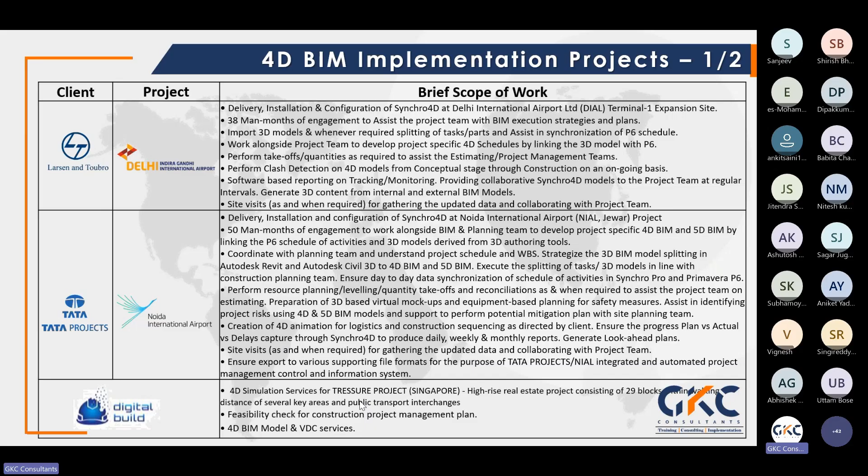Mainly our today's webinar focuses on this only, how 4D BIM is transforming airport infrastructure and how important it is. Our speakers will give you a very fair idea about this.

Now let's look at some real world 4D BIM implementation projects that demonstrate how BIM technologies are being applied in large infra and construction projects. We have done Shobha Limited 4D implementation. We have also done BMRCL in Bangalore International Airport. Shobha Limited is another major implementation that was carried out focusing on 4D 5D BIM workflows.

This included planning, sequencing, quantity takeoffs, resource planning, model management, and construction simulation. The project also involved generating 4D mockups, visual planning outputs, and progress tracking.

Treasures at Tampines, Singapore - we also contributed to the Treasures at Tampines project in Singapore where 4D simulation services and BIM VDC support were implemented for high-rise residential development. The focus was on construction project management planning, visual simulations, and digital coordination workflows.

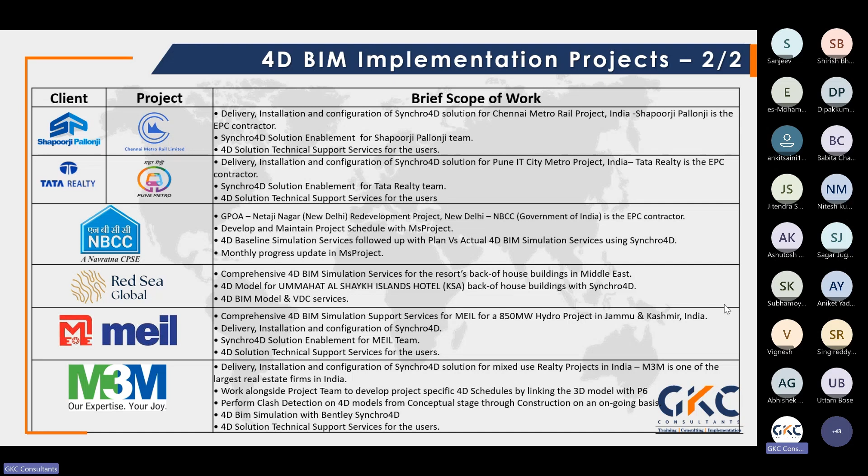We have also supported other infra projects: Chennai Metro, Shapoorji Pallonji, Tata Realty Pune IT, Tata Realty, Netaji Nagar Redevelopment Project, NBCC. So these are some of the projects.

In addition to 4D BIM, we also worked on 3D BIM modeling projects. For example, we developed 3D BIM models for airport infra projects, including the Hubbali Airport Project and Ratle Hydroelectric Power Project. These BIM models help in design coordination, clash detection, and project visualization before construction starts.

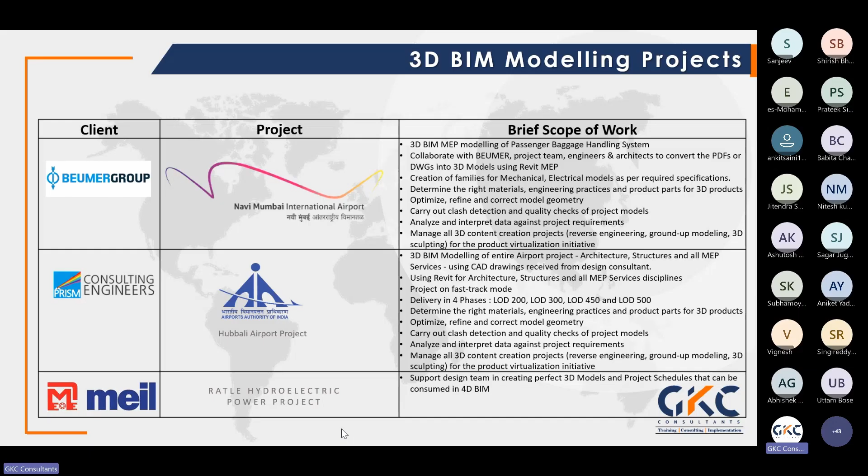This slide also highlights some of the project management implementations delivered by our organization, such as GIC, BEUMER Group, DC Infrastructure, Johnson Lifts. These are some ongoing projects. We have delivered pre-bid for Bangalore International Airport. The scope includes Primavera P6, schedule development, pre-bid planning, 4D BIM simulation. Another one is for IKEA, where we have delivered with Glaze Techno and also Johnson Lifts.

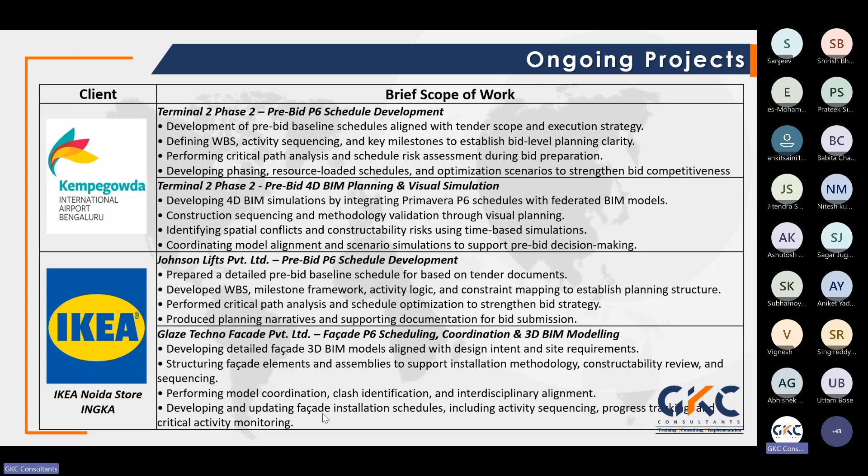Let's move to the main webinar you guys are waiting for. Sorry if I have taken much of your time.

It is now my privilege to introduce our first speaker, Mr. Jitendra Shukla, AGM BIM expert at Nippon Koei India Private Limited. He brings more than 18 years of experience in BIM and digital delivery across airports, metro systems, and infrastructure projects. His expertise includes ISO 19650 CDE, 4D/5D BIM workflows, BIM automation, and digital transformation initiatives. Now I would like to invite Mr. Jitendra Shukla to take the session forward.

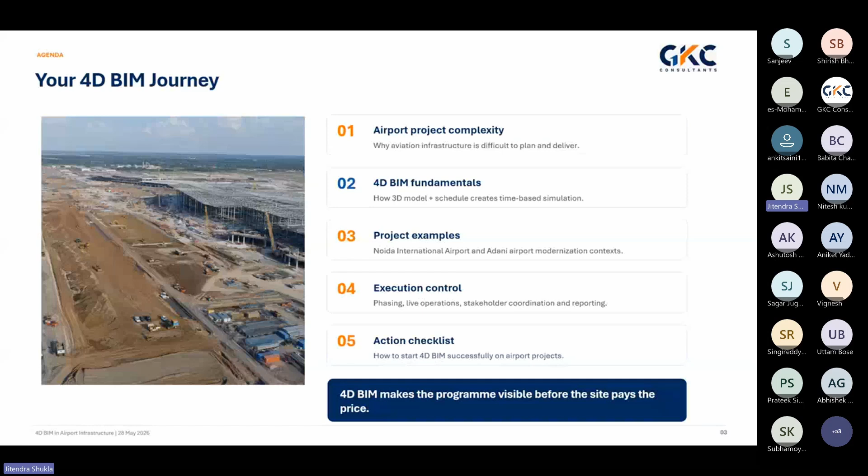So why are airport projects very unique and prominent? In an airport project, if you see, no one can work alone. I cannot say that as an architect or as a civil engineer I will work on the particular project alone. There is a collaboration approach.

There are multiple stakeholders engaged in the project. They can be architect, structure, mechanical, electrical, plumbing, firefighting, IT, ICT, urban designer, planner, QS, quantity surveyor, contractor, subcontractor, and of course the owner whom we are going to hand over to.

So we have multiple areas in an airport, as most of you are already aware: the runway, apron area, taxiway area, and how these utilities are going to happen on the site, how we can identify how much time it will take to finish this activity. I will not go completely into the software, because my next colleague will explain this one.

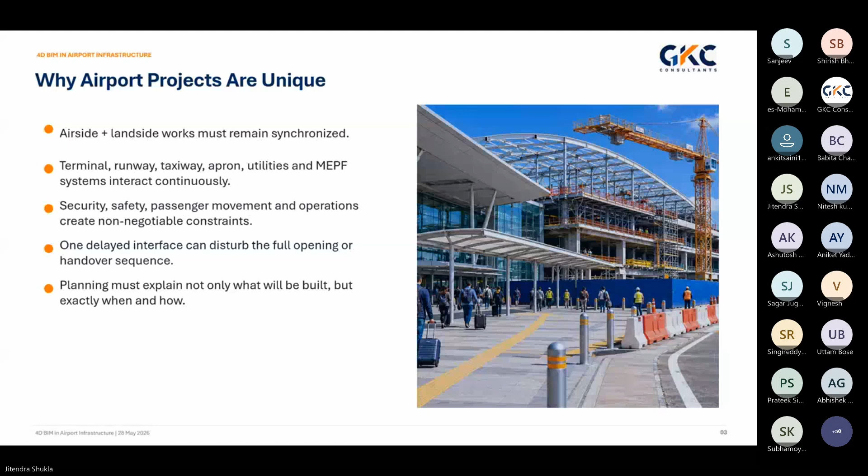And while doing the planning, we can mitigate the issues we are seeing, and do delay analysis: where we are getting the delay and what the reason for it is. And of course, in every project there are some challenges, and it depends how we are going to mitigate those challenges and what the root cause is.

So when we talk about the airport project, definitely the main cause we understand is communication, miscommunication, which is a very critical part of any project. Sometimes we are not communicating in a proper way, or it might be the IPD process. All the stakeholders are not aligned in the first meeting. They might be jumping in once the phase has been completed, so they are not aware of the scope and time of the project.

So in any project, the engagement of the stakeholders associated with the project is very critical, very crucial. They must be aligned. They must understand the scope and the time of the project, and what the information is, who the right person is, and in what right format I can achieve it. It can be either open BIM or closed BIM.

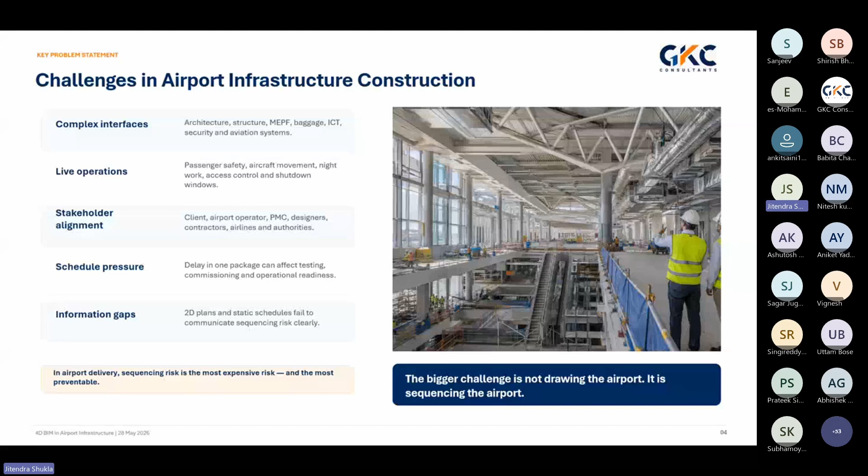Definitely, what is 4D BIM? 4D BIM is nothing but, as we have already discussed, once my 3D model has all the information as per the LOD or the LOI, the geometrical information, then we go to the scheduling part.

And for scheduling, there are lots of applications, but as I understand the market from my experience, the best one I have found is the Bentley system called Synchro Pro, where you can find the dynamic clashes, you can find root causes, and you can integrate multiple applications with Synchro. You must have an XML file, CSV file, MSP, or the Primavera file. These are the critical files.

And it doesn't mean that after completing my model, I then move to the schedule. This planning has to start from the beginning of the project, when the planning team has to work closely with the BIM team. So what information are they looking for in the future? That information can be integrated to avoid delay.

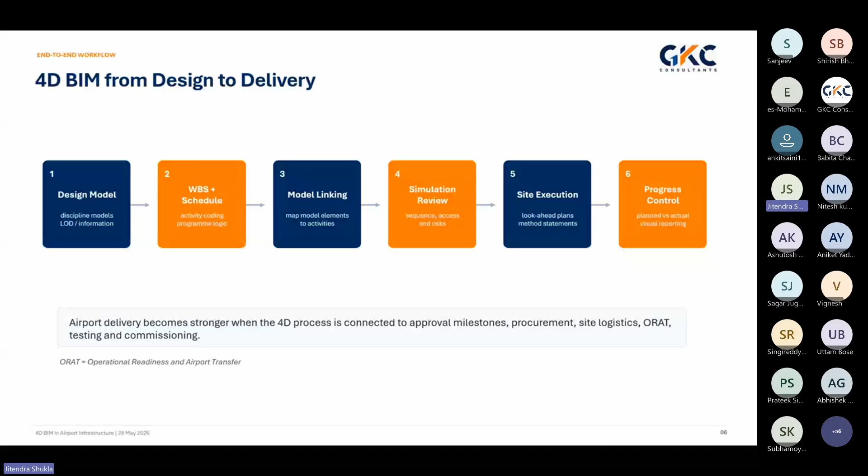And this is not only the planning person, but the contractor, the subcontractor, even the owner, they can comprehend here how much time we are going to complete this task or this activity. So we can control and we can monitor the progress of the project.

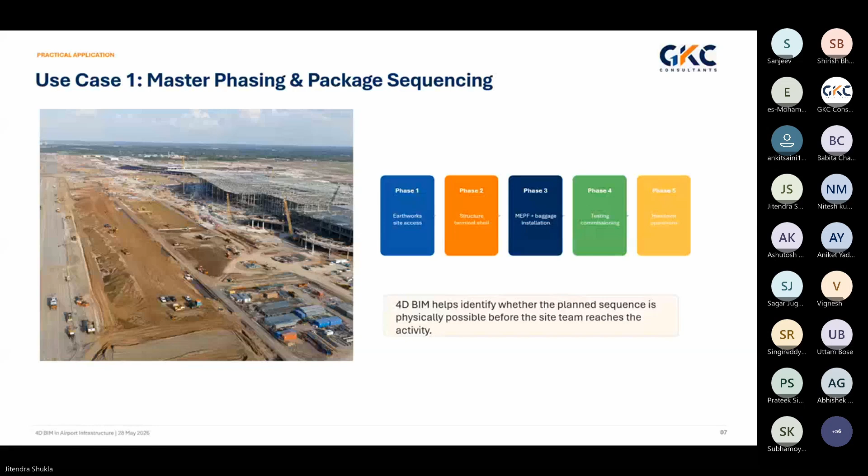And now the question comes here, why do we have to go 4D? Still in the market, the guys are struggling till 3D. But after modeling, what do I have to do? Can I see? Can I get the best ROI? Can I see the progress? What could be the impact of this, my building, my component, my element? Am I losing something? Is there going to be any cost impact? What would be my budget? Am I aligned with my budget?

So these are the challenges. These are very humongous challenges, which are critical to identify. But having an application like Synchro Pro, and how we integrate that information into the modeling, then we can identify and see what are the main planning aspects of the project.

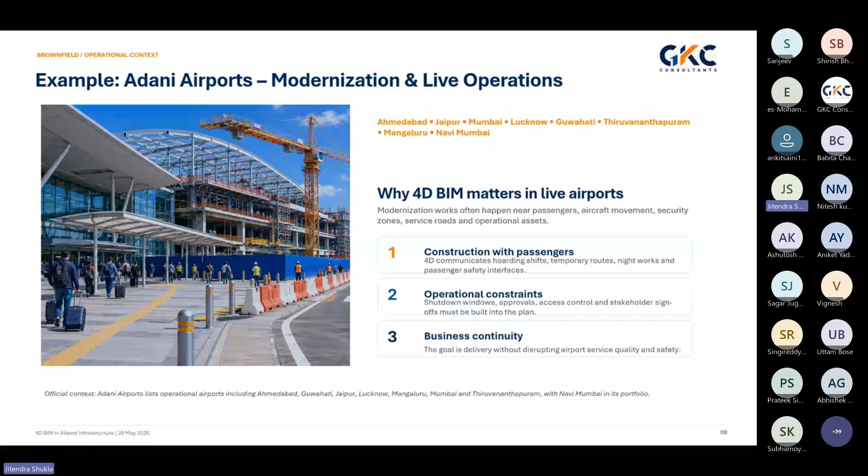Even for Adani, for the land side area as well as the air side area, this is a requirement of the client, so you can comprehend here what is the importance of the fourth dimension. So that can be used under the phase of construction, operational, and continuity of the business outcome.

So definitely in a live airport environment, you can see here, there are lots of components. It doesn't mean only a few components; I can simulate, I can find how this activity is going to perform and how much time it will take. So definitely as per schedule, as per the level of detail we have done, we can do the planning and we can get the best ROI using the right format, in the right direction, with the right person, and definitely at the right time.

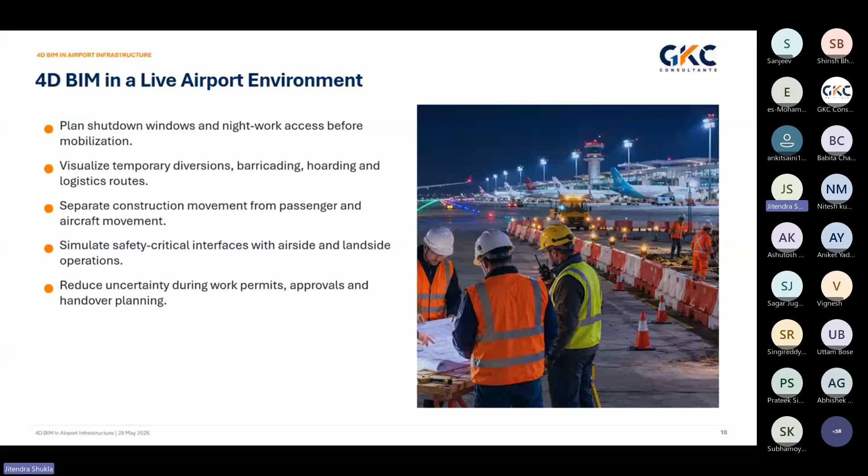So already we have discussed the engagement of all the stakeholders. So we can come on the same page, in a local language or a simple language we can understand. So everybody can understand from briefing to handover to the client. So this is called integrated project delivery. It doesn't mean one person can work in isolation mode and share their drawings and simply say, okay, I have done my part. No. All persons will come together and, as per the requirement, we need to work.

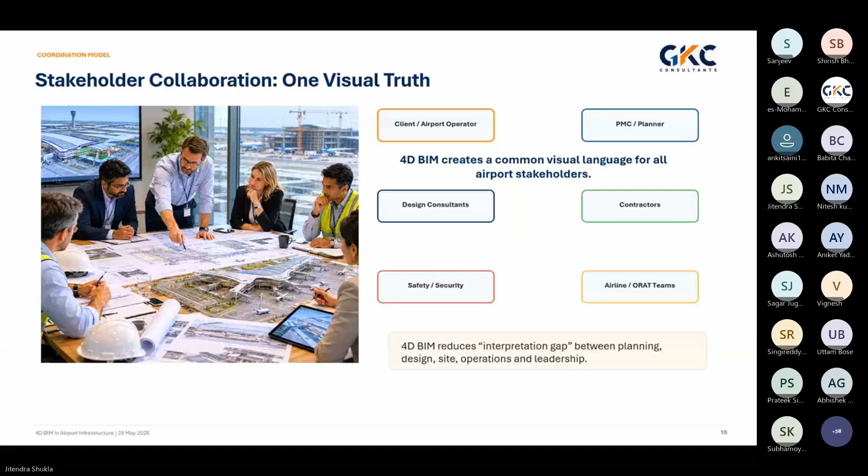Yes, we are working for site; the simulation comes after the model for the BOQ purpose or for tender purpose. Now we are going for site execution. You can have a 2-week plan, your monthly plan, or daily execution you want. You're talking about the facade: how many panels can I place in a day? 1, 2, 3, 4, 5. Then you can see how much time it takes.

So see, even the government has mandated all projects have to use BIM. So you can identify daily execution, how you're going to do it, and your progress. You can monitor your progress here.

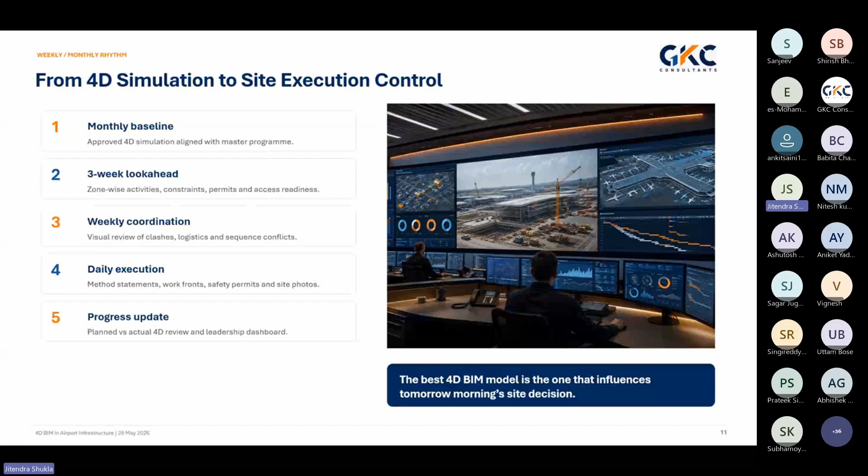Definitely, we know as the planning engineer what was my plan and how much I achieved, what is my actual, because sometimes what I or the planning team have planned, there are some trigger events. So we need to understand how we can mitigate these trigger events while working in the planning.

Because we can think, okay, this is my plan for 2 weeks or 3 weeks. But are we smooth? Are we streamlined? If not, what are the risks? And those risks, how do I try to overcome them? What are the parameters and the constraints there?

The benefits, we know: faster approval, and we can definitely deliver with confidence. We know the pros and cons of the project, better safety planning, health planning, period planning. In a nutshell, we can reduce rework by 40 to 50% at least in the beginning. But as you are progressing, definitely you can achieve 0% rework. I won't say 99%; 0% you can achieve without having any issues.

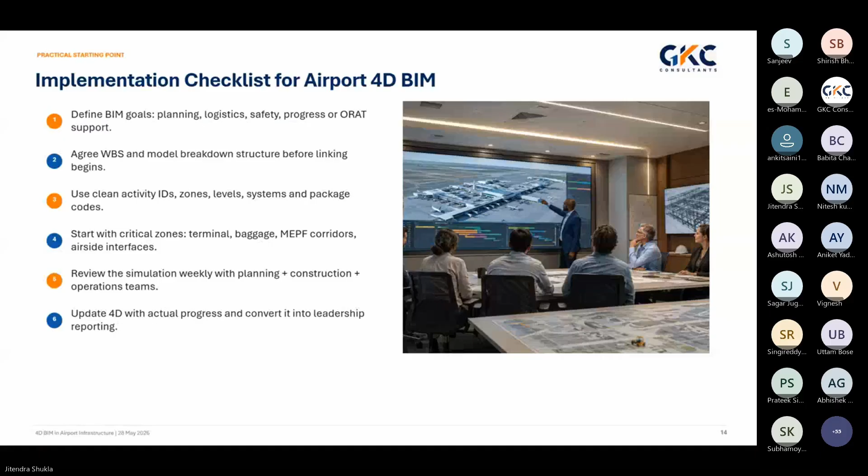So these are the takeaways, if you can say. 4D BIM connects design definitely with the time schedule. Already we have discussed how we are going to control and deliver with the animation. It doesn't mean animation in a single shot. How the construction is going to happen on site as per the time, schedule, resources, allocation,

how much time the project manager, the project engineer, the resources allocated devoted, and how much activity we have accomplished, 25%, 50%, or 75%, likewise. So thank you. This was regarding the challenges and how we are working in the airport.

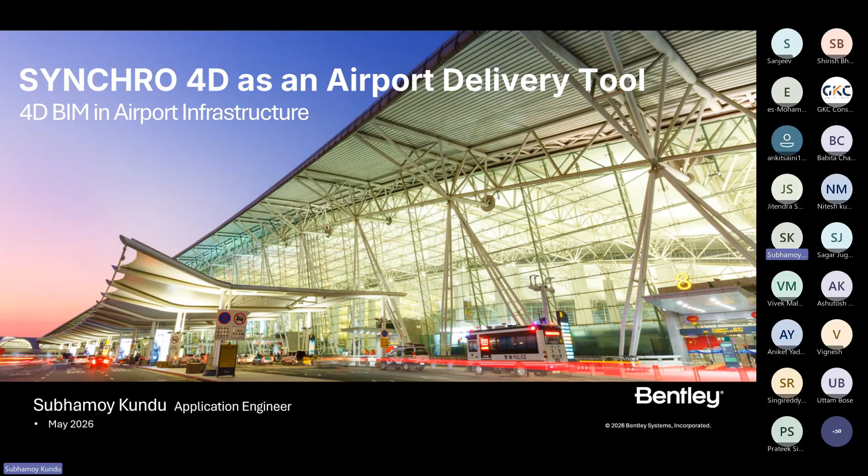So as I was saying, we are going to unfold and see how Synchro 4D will help you to deliver airport infrastructure. So this brings us to the most important question: what are the commonly faced issues in a large project like airport design? We see that in a large project like an airport, a lot of complex systems, multiple stakeholders, contractors from different disciplines come together to complete a very tight time-bound project.

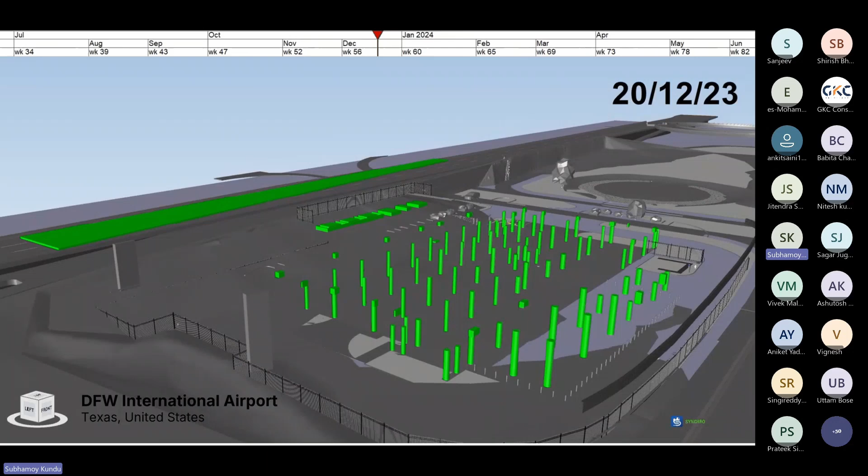They are also dependent on one another, along with a safe and precise execution of every task. So we do need proper sequencing and alignment of task activities. Otherwise, we will be facing delay in time, overshooting the estimated cost and hampering the overall project completion.

Some of the common issues which are found in large projects like airport are as follows. Firstly, large projects do have large number of interconnected data involving multiple disciplines and activities. Managing these tasks requires clear visibility of both schedule logic and physical construction progress.

Secondly, parallel construction zones make life difficult for the project team. While parallel execution accelerates delivery timeline, it also introduces spatial constraints, shared access routes, and eventually safety challenges. So every team must be aware of operational risks, clash areas, logistic paths to avoid those kinds of risks.

Then involvement of multiple contractors and subcontractors from different disciplines makes coordination between them a critical and difficult job. Missing the coordination will easily lead to conflict and inefficiency, which will in turn make the project much more difficult. Tight commissioning timelines can make navigation tough, so there is little room for error. Effective sequence and visualization of possible clashes keep the project momentum to timely delivery of the project.

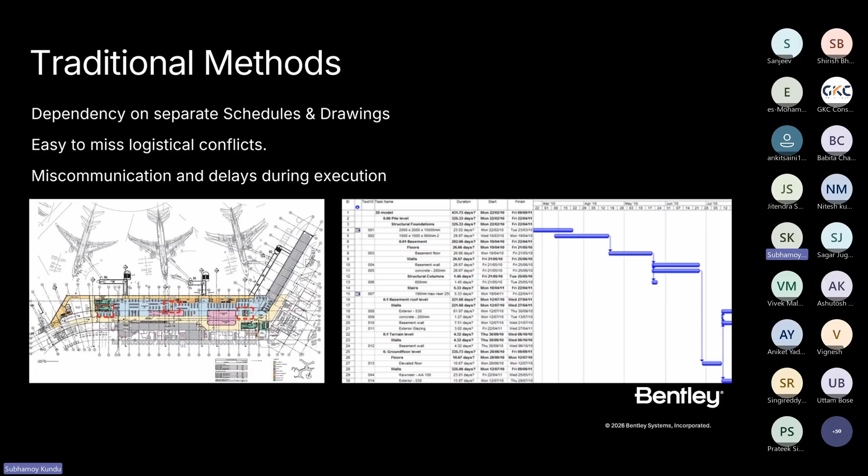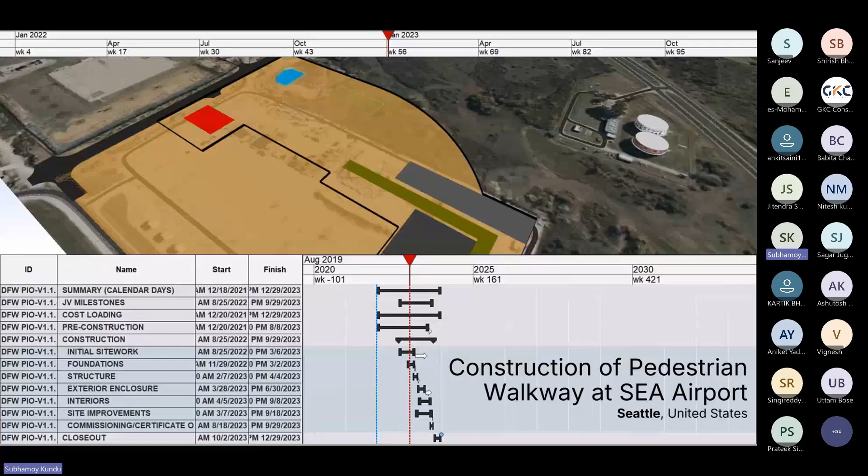Keeping this in mind, let us try to understand why it is important to incorporate 4D planning in large projects like airport. Advanced planning through 4D BIM enables project teams to simulate the construction sequences before the actualization of the construction. By visualizing how the activity will unfold over time, teams can easily understand the task dependencies and potential conflicts well early in the planning stage. This proactive approach improves coordination among the stakeholders and significantly reduces the uncertainties during construction.

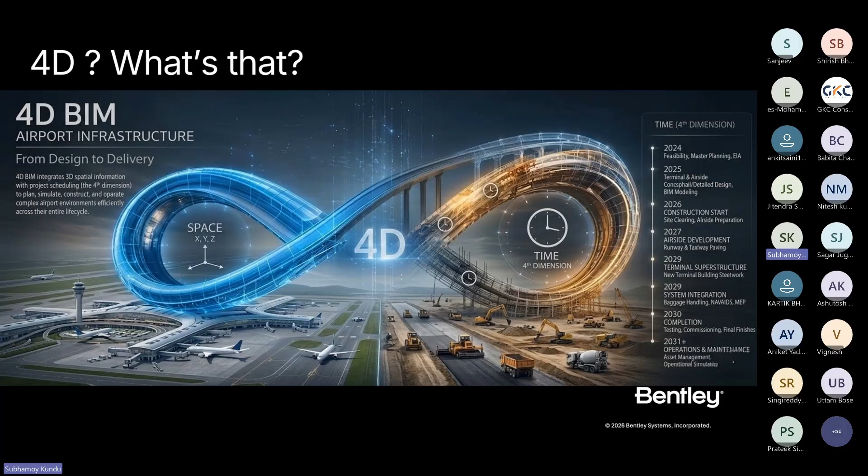Let us understand what is 4D BIM. 4D BIM is a 3D design model along with time-related information to create a virtual construction simulation or sequence. It gives you an idea how the construction will unfold over time. You can say it is actually a digital rehearsal of the whole process.

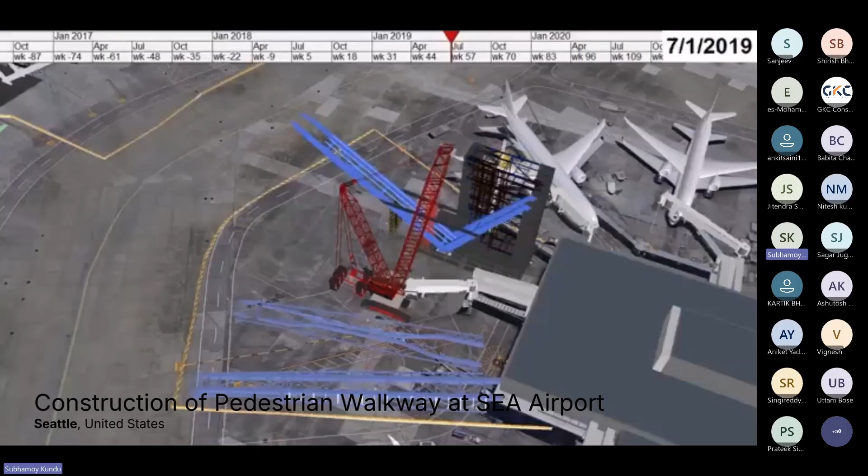In pre-construction stage, 4D construction sequence acts as a digital rehearsal of the whole project. This helps the different teams to plan visually and collaboratively. They can identify the potential bottlenecks which would have been very difficult to find just by staring at a task list or just by looking at the Gantt chart. Also, as all the stakeholders may not be able to read or interpret the Gantt chart properly, having a visual medium to communicate or explain the same is really helpful.

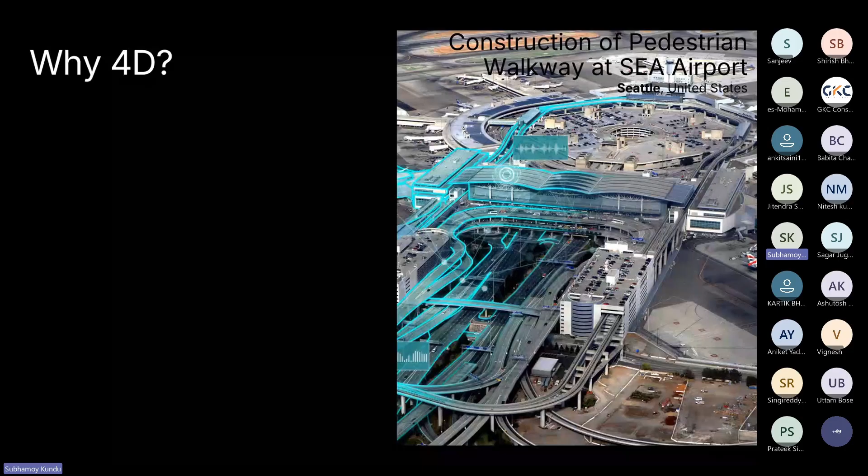So incorporating 4D BIM in your project and making it a 4D reliant planning approach does have several benefits. I am trying to mention a few important ones. To start with, 4D enabled project teams can have better coordination, improved communication, and make more informed decisions across the project lifecycle. A digital rehearsal of the construction process can help to identify risks and critical issues so that they can be mitigated by taking preemptive measures rather than going into firefighting mode during the construction process.

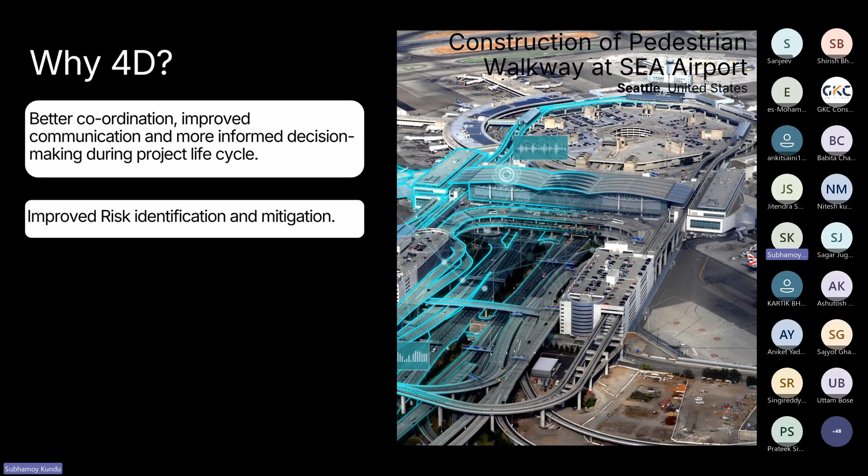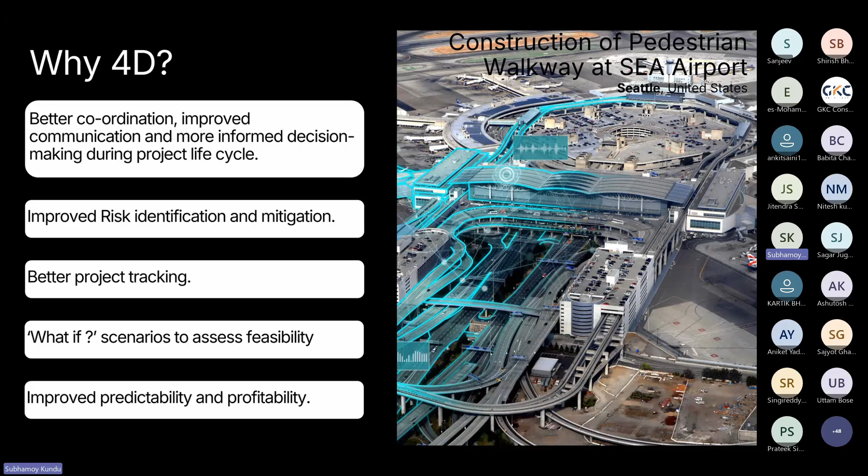You can keep track of your project updates and their impact on the overall schedule. You are able to find out the best suitable approach for your project by creating what-if scenarios. This will help you to assess the feasibility of execution and the impact on both time and cost of the project. 4D immediately increases the predictability and profitability of the project by helping you to finish the same within budget and within time. Synchro as a solution can help you to achieve all of those. So this brings me to Synchro.

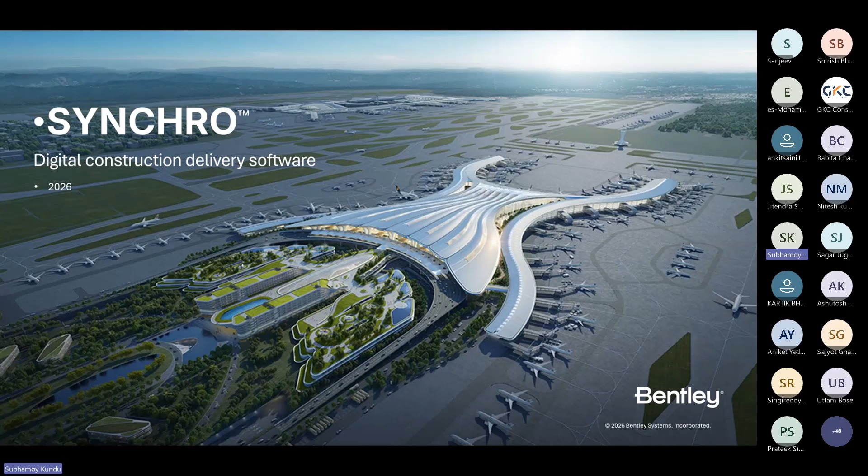Synchro is Bentley's digital construction delivery solution, which can handle schedules, quantities, progress data of the project with comprehensive engineering information. This empowers teams to achieve better project visibility, program validation, and risk reduction throughout the project lifecycle. To develop a 4D modeling workflow, we need two components. First and foremost, we need the 3D model and the schedule or the time information. Model elements or groups of elements are driven by activities or tasks identified within a construction schedule and linked to resources and to their costs. Like I mentioned earlier, 4D manages time, resources, and the design model.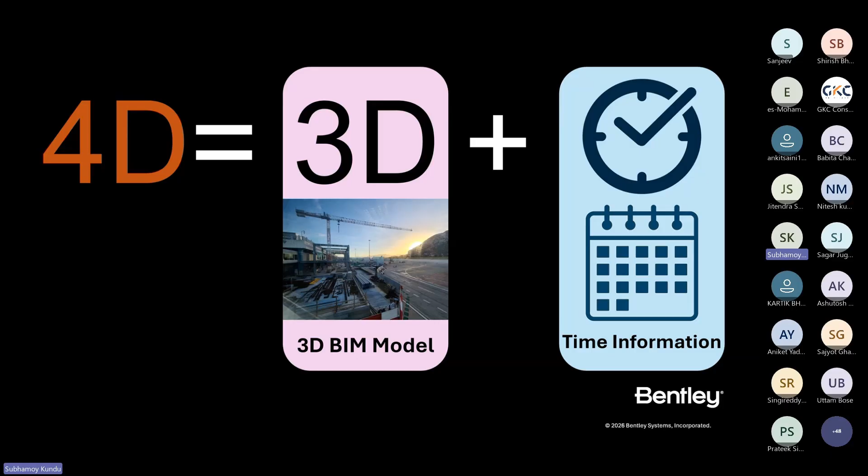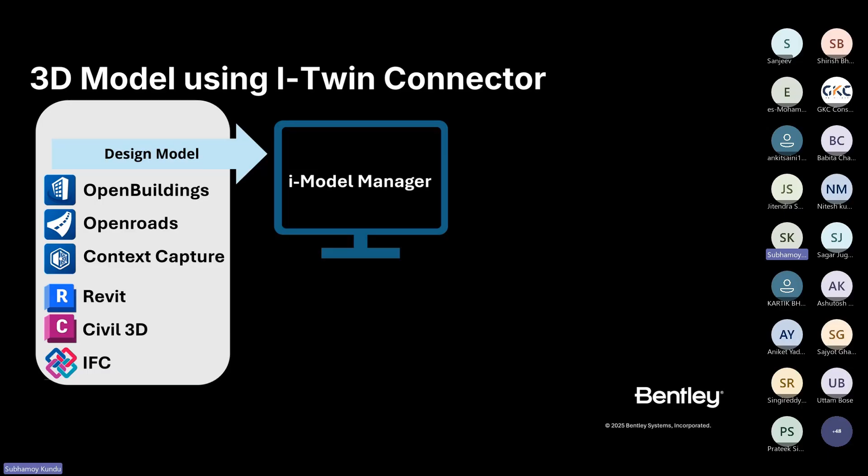Synchro is now integrated with Bentley cloud environment. So to start with, we need to create a project first in Bentley Infrastructure Cloud. Design files can come from Bentley design applications like OpenBuildings Designer, OpenRoads Designer, and many more, or any other external design applications like Revit, Civil 3D, etc. There is a specific connector available for each of those file types within the iModel Manager within Bentley Infrastructure Cloud or BIC, which will create a federated 3D iModel that will become the source of downstream 4D and 5D workflows.

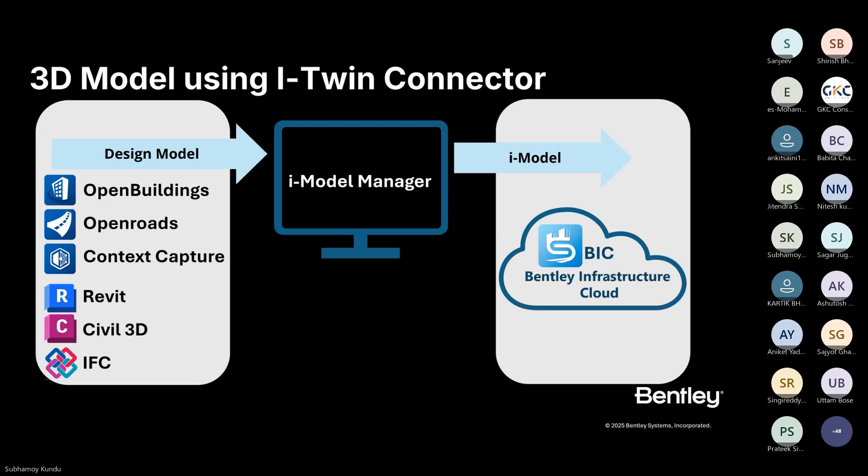Once the iModel is created, you can open the same in Synchro 4D Pro, which is a desktop application to further work with your schedule and then proceed with the 4D model generation. If you wish not to connect to cloud, you can open any standalone project which is not uploaded in BIC in our desktop application. As far as 3D models are concerned, Synchro 4D Pro can support overall almost 50 types of file formats.

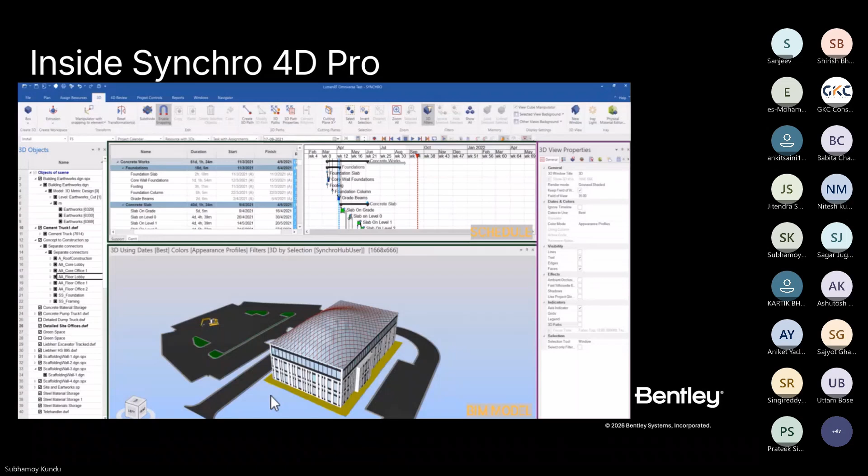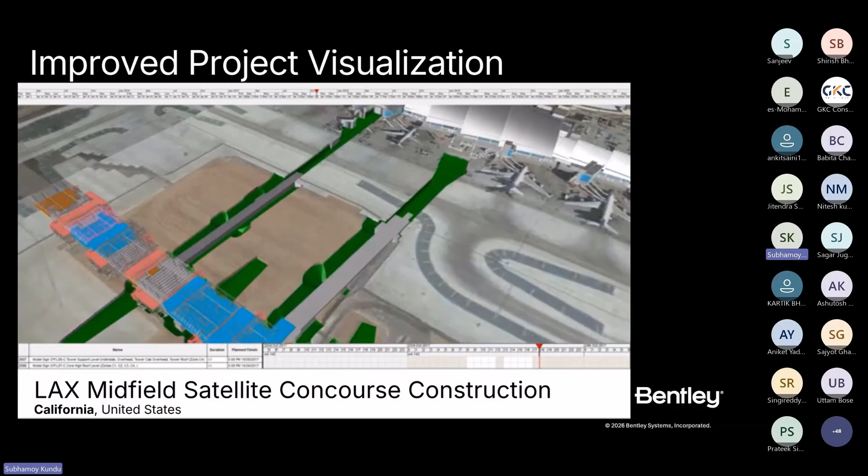Let us move to learn key benefits of using Synchro 4D in your airport project. 4D sequencing effectively increases stakeholder collaboration by enabling the following.

Firstly, faster understanding of the schedule for non-technical stakeholders. Secondly, clear visualization of important milestones and major dependencies. And finally, improved coordination between design, operation, construction teams and all other stakeholders.

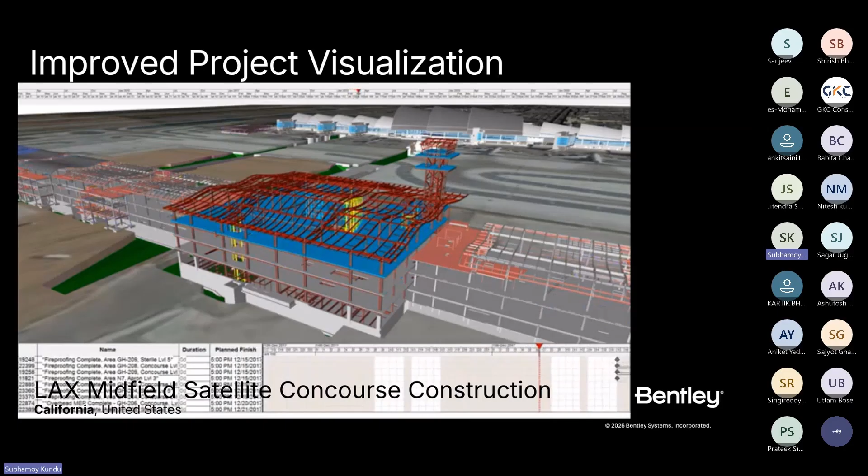Continuing with scheduling aspect, Synchro is capable of bringing schedules from other planning tools. However, I must mention that, which is actually a very important point, that Synchro has its own CPM engine, so it is an independent planning tool. It is also possible to generate a schedule from scratch inside Synchro 4D Pro.

As it has a CPM engine, it also gives you flexibility to modify the imported schedule within Synchro. So you can easily bring in a high level schedule and add or modify further details inside Synchro. For this, you do not need to necessarily go back to the original scheduling or authoring tools. These modifications can be easily pushed back to the original scheduling software to make sure that the schedule being used in either of these tools are in sync.

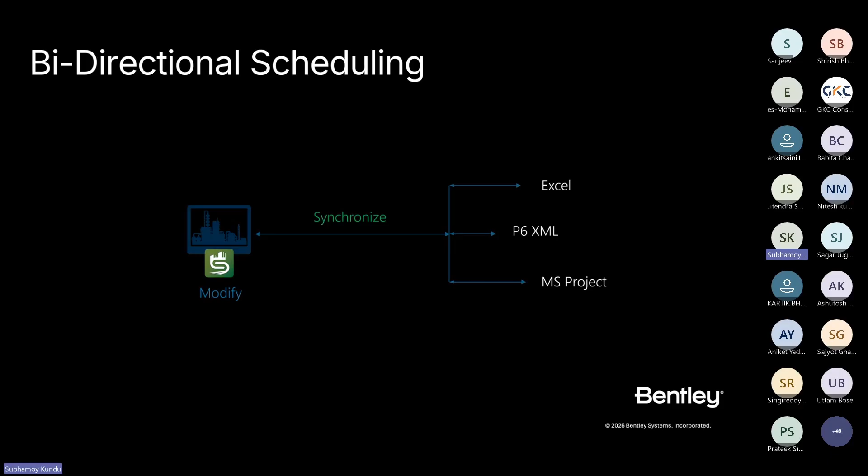Synchro has got very powerful filtering capabilities, both for the schedule as well as the 3D model. So you can use task filters to isolate the activities in your look ahead planning. Say you want to create a task filter for 2 weeks look ahead. You can add those values in the filters and those will isolate the task activities which would be conducted in the next 2 weeks. And then the same thing can be reflected in the 3D model as well. In the schedule, only the tasks available for next 2 weeks will be visible.

And then if you need to, you can color code to highlight those activities or the part of the 3D model which will be due for construction in the next 2 weeks, for which you have created the look ahead filter. So you will have the task list and the 3D model side by side, showing or highlighting only the parts due for construction in next 2 weeks.

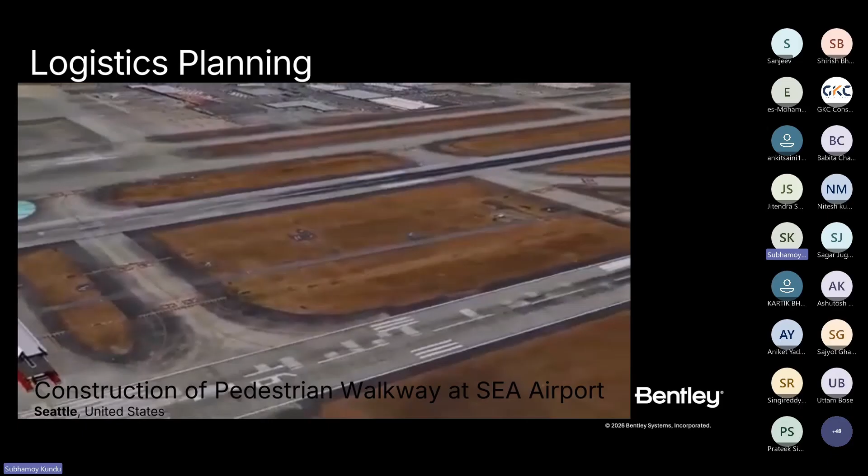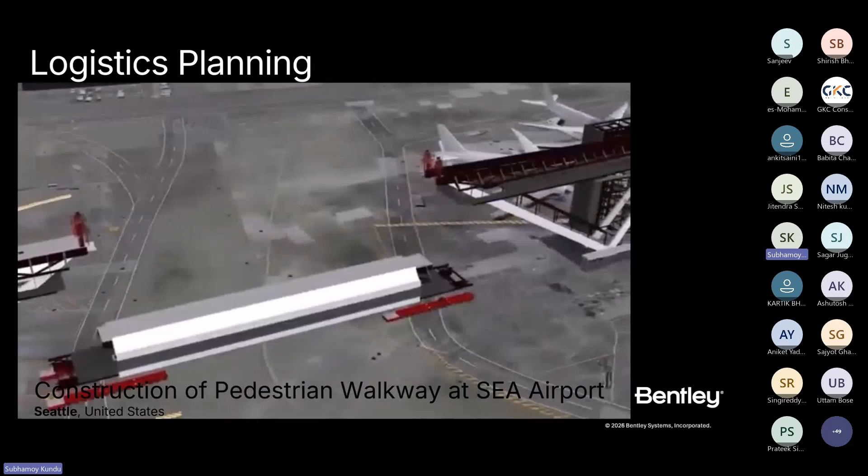Coming to logistic planning, using Synchro 4D Pro, you can create your site logistic planning. You can get clear ideas about where to store construction material, heavy machinery movement path, critical staging activities as part of your digital rehearsal. Sharing the same with different stakeholders or contractors effectively communicates the sequence and safety measurements that need to be followed on site. So this can be a part of your toolbox meeting.

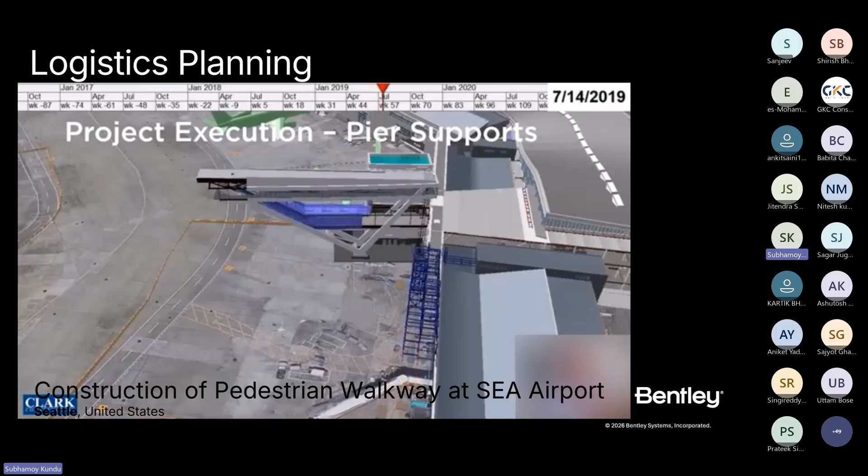With Synchro license, it provides you an extensive library of equipment that you can bring in and animate using the tools which are there inside Synchro 4D Pro. But if there is a specific equipment requirement, you can always bring in any equipment in a compatible format. Basically, any 3D model item can be used as an equipment.

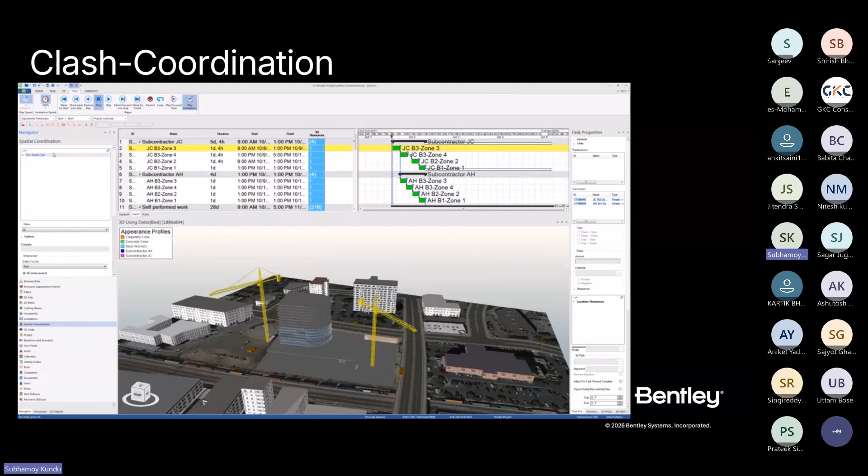Another important feature of Synchro is it is able to do clash coordination. You can have clash coordination for items or fixtures, workspace, logistics, path, etc. All you need to do is define the 3D item on which you need to check or run the test. Once done, a new window will appear with the list of clashes that is happening in those particular 3D items. So you can check the list of clashes and decide what kind of changes you need to do in your schedule to avoid the same.

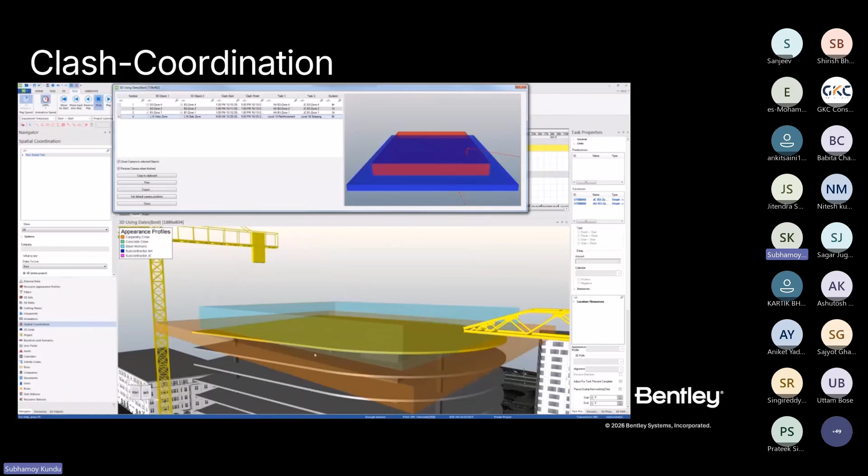If necessary, you can also take some other steps to avoid those clashes. Just by looking at the Gantt chart, it will be very much difficult to find out. But by looking at the visual representations, it helps you find these types of issues early, and in turn it helps by reducing the rework or issues at the site while construction is going on, and you can finish the project within stipulated time.

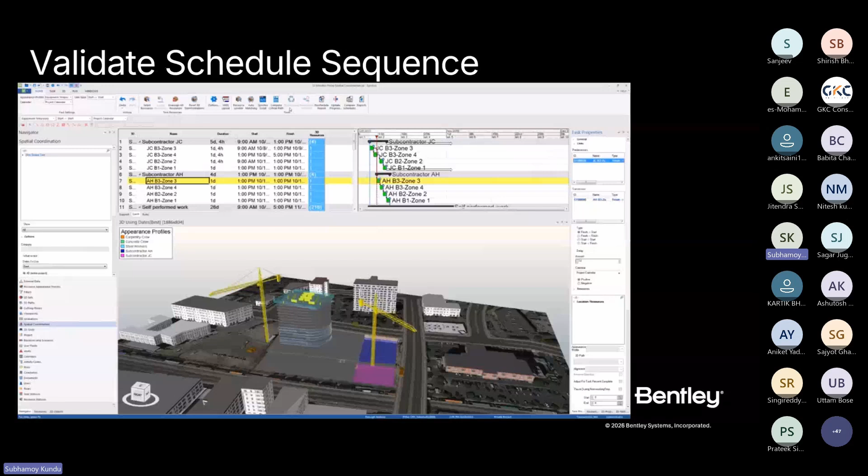In continuation to the earlier example, we will discuss schedule sequence. You are already aware that Synchro has its own CPM engine, so if you want, you can make the required changes in the schedules without breaking the linkages. You can create a new task or a new dependent task, maybe a parent-child dependency within Synchro.

Now, in this example, if we change the time of a few activities by delaying them by 1 day and reschedule it, the linkages will still be there, and once we run the animation, we can see there are no workspaces overlapping with one another. Like I mentioned earlier, if required, we can sync the updated schedule by exporting it to the desired external scheduling software.

Using BIM data and the auto matching option inside Synchro Pro, we can create a rule. Generally, my suggestion would be to create a rule for a smaller subset of the 3D model as well as the schedule, using only the selected resources and selected task. Then we need to define the attribute that is common between the task and the resources, making sure that the value is an exact match, or it can be a substring of the corresponding attribute, and so on.

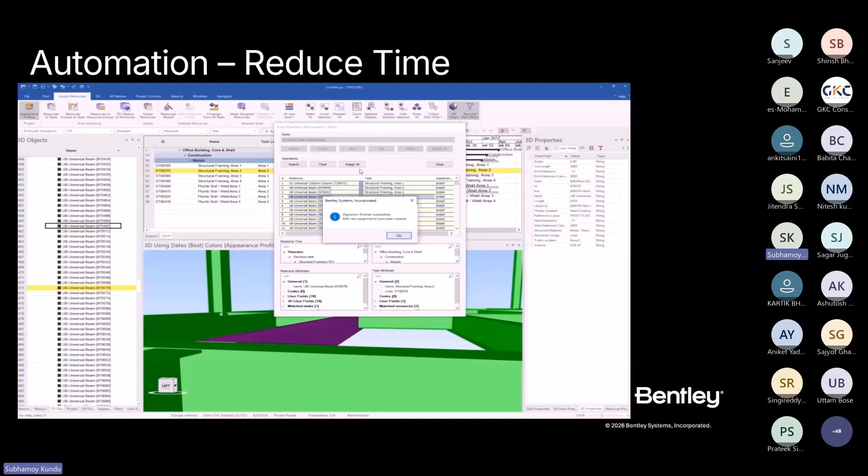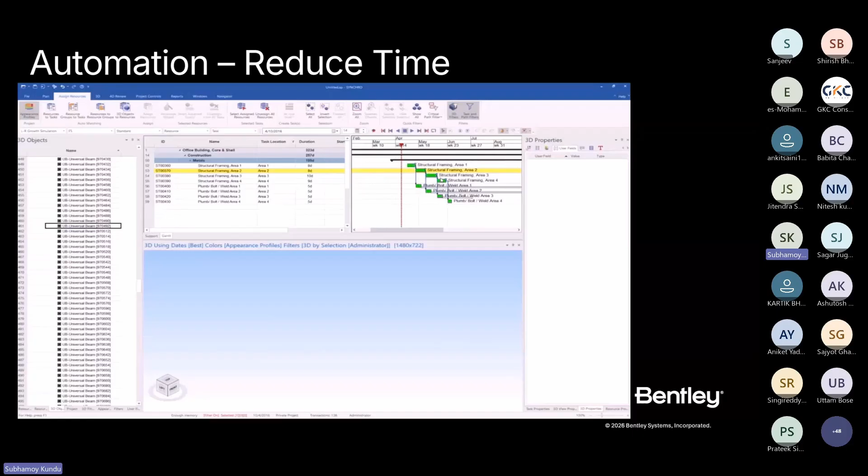Using it, when we run the rule, we do not have to manually link each and every 3D object with the activity in the schedule. The auto matching rule ensures that these automatic links take place without you having to link each item manually. This can save a lot of manual hours and will be a huge saving in time, but it essentially depends on the amount of relevant data present in the schedule as well as in the 3D model. We have to make sure there is a sense of commonality between the line items in the schedules and the data that is there as a resource attribute.

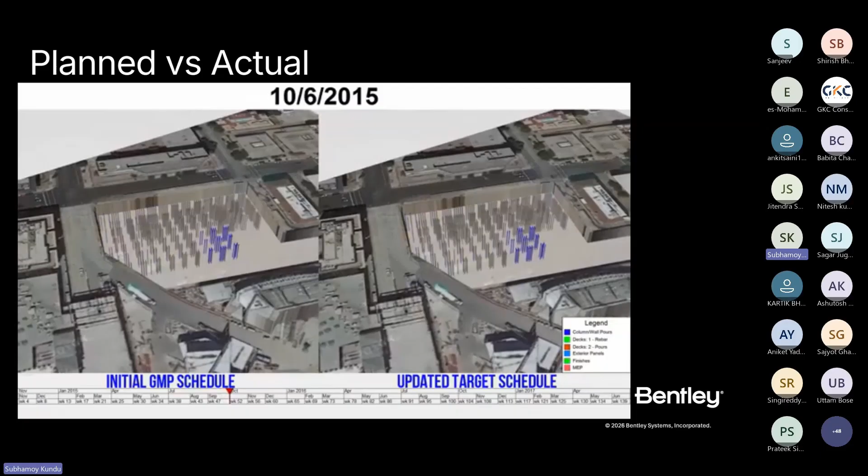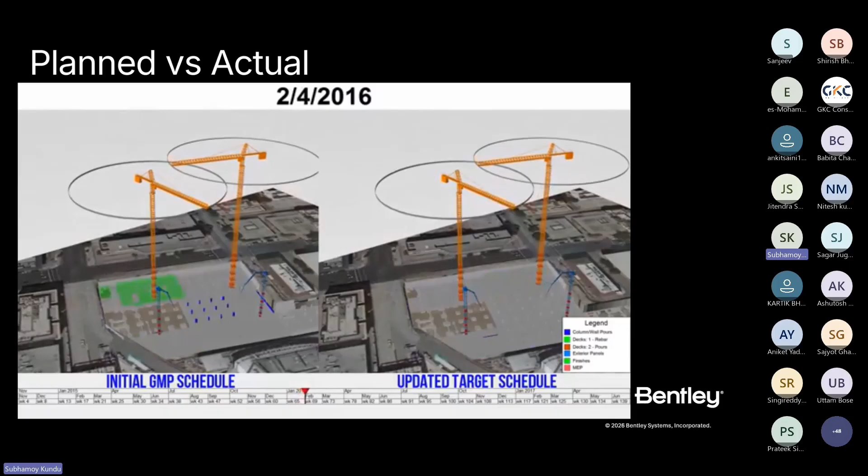Let us discuss another unique feature of Synchro, known as plan versus actual capabilities. Synchro is capable enough to handle multiple baselines. You are able to bring in the baselines from the pre-construction stage in one 3D window with the initial plan schedule, and in the second window with the actual schedule, then have the visual and graphical representation of plan versus actual, so you can understand the delays quite easily.

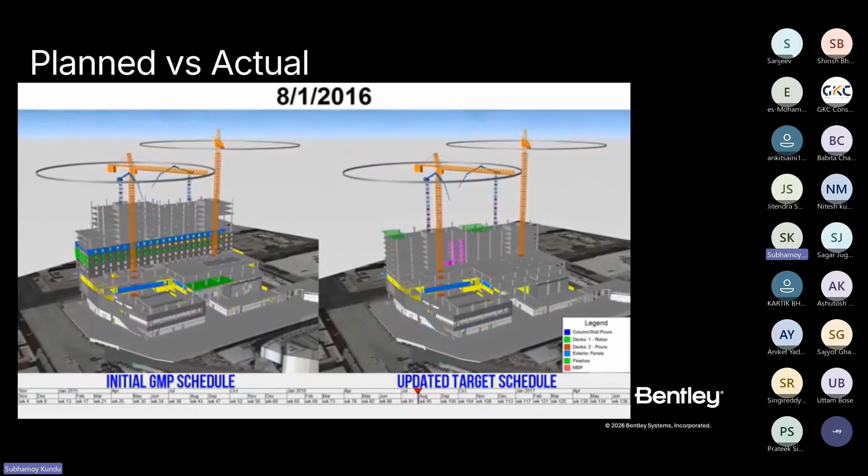Just by looking at the comparison between the original plan schedule and the one which ultimately gets actualized on site, it gives you an idea of the performance of your initial plan. You can also use the same feature in the pre-construction stage to compare between multiple possibilities of baselines and find out which is best suitable for your particular project - the what-if scenario to find the best path for your project.

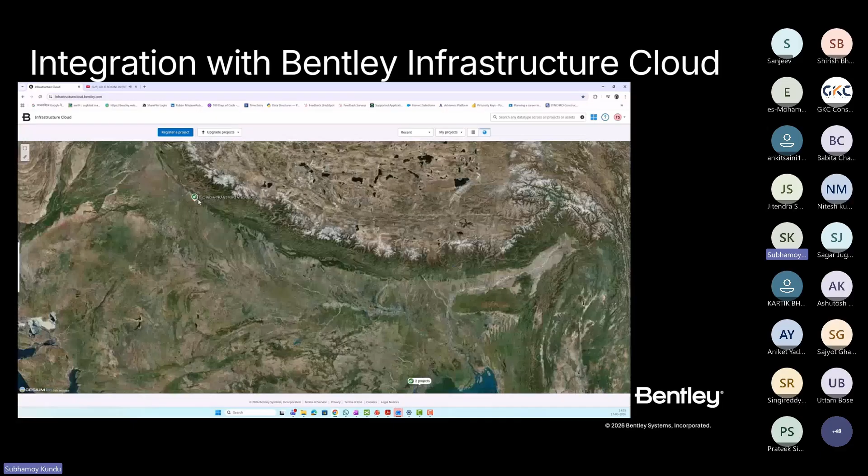Let me show you a glimpse of Bentley Infrastructure Cloud. Earlier I mentioned that Synchro is basically a part of BIC, or Bentley Infrastructure Cloud. You can get the license of BIC with Synchro 4D. This is the interface of Bentley Infrastructure Cloud.

You have the maps view where you can view all your projects within the map location. You can switch the model so you can see the same from the map location as well. Then comes the default grid view where you can see all your projects, and once you go inside a particular project, you see all the related documents or data inside. You can see the document repository where you can keep all your project related data.

In the schedule window, you can visualize the 4D iModel, meaning you can actually see the entire 4D construction sequence just from the website without needing an application. You do not need to install any application - all you need is an active internet connection and an internet browser to use it.

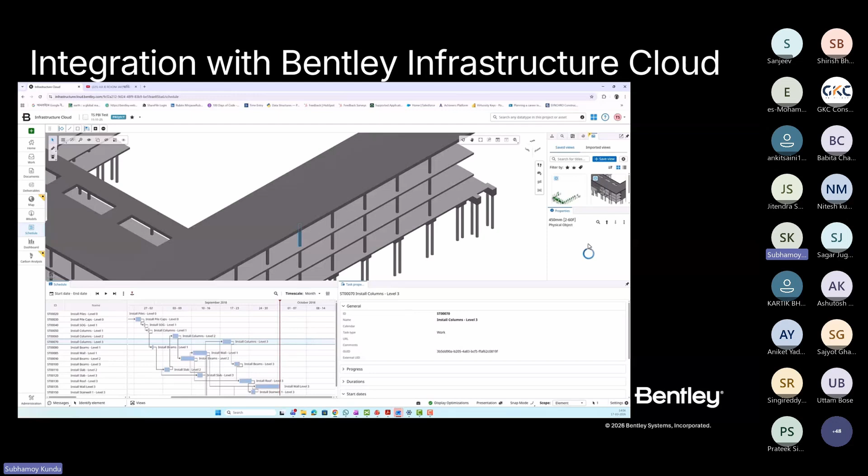Other than various model reviewing tools, you will also have access to digital forms to raise RFIs, to exchange information between stakeholders. The issues raised from site are also available here. Another important feature is that these RFIs can be assigned to a person, and that user will be automatically notified. You can also select a target completion date. Once completed, it can be returned to the originating person along with an automatic notification, so having the model with you while resolving the digital RFI is actually a very big benefit.

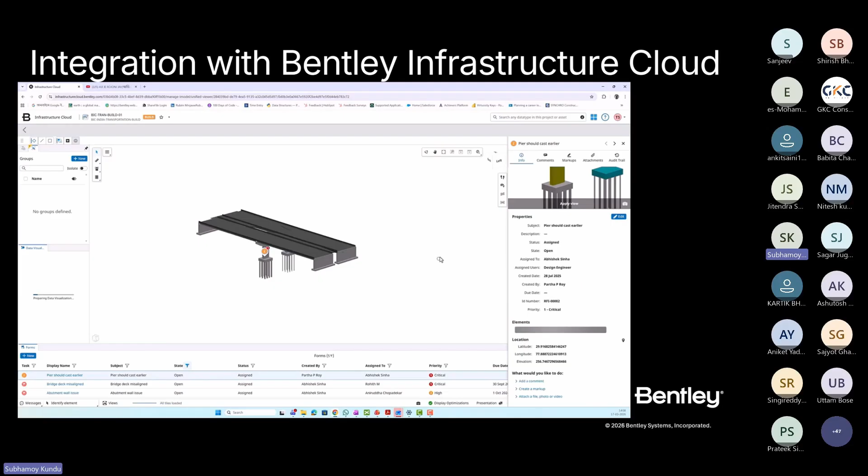You can host all your project related data like construction models, iModels, PDF files and other required documents in your cloud environment.

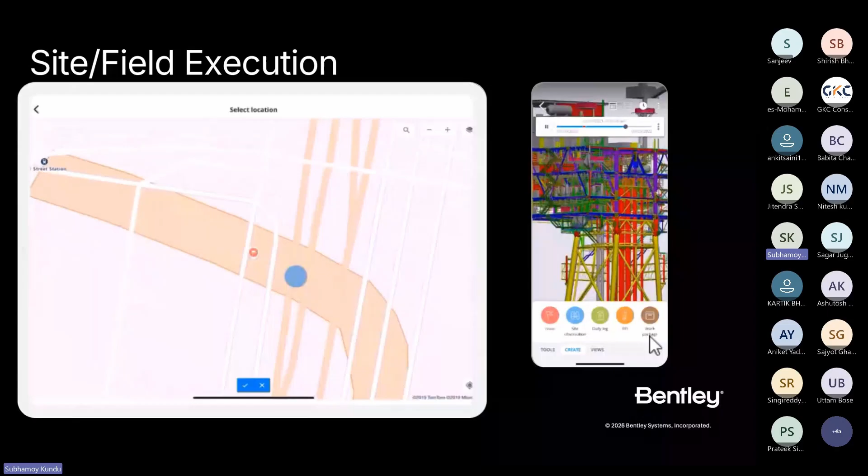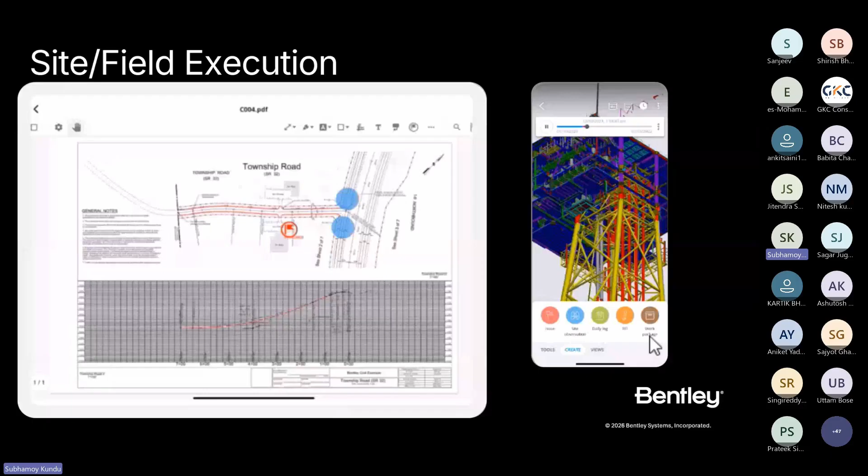Mostly it can be used to track progress of site conditions by updating required information like current site progress update, resource status update, and then syncing the same with the 4D Pro model file, and eventually the task status is updated. There are customizable forms using which you can share your feedback information. Keep in mind that to achieve this, you need to host your project in the cloud.

Now we have seen most of the important benefits and functionalities of Synchro. Let me try to sum up some of the usage of Synchro 4D in the entire life cycle of your project.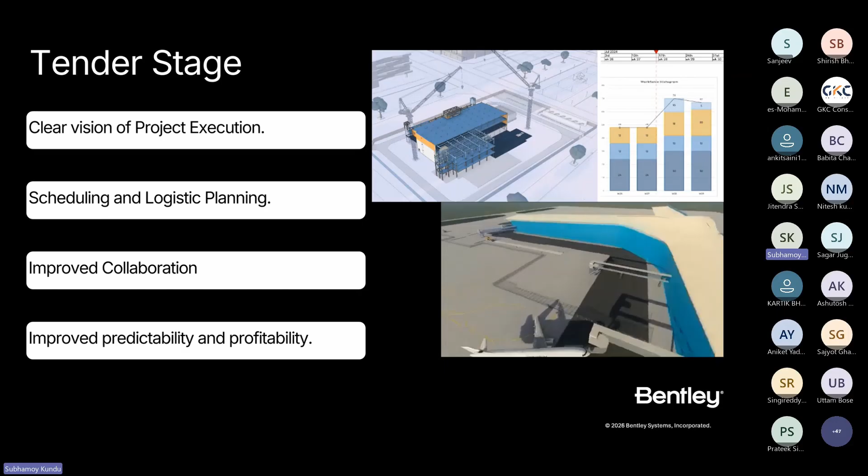Let me start with the tender stage. In the tender stage, time is very limited, and conveying the end user with only a Gantt chart and drawings might not be sufficient. So the tender stage animation can be very helpful to convey the project narrative in a short span of time. Also, compelling animations can help you in winning bids.

You can have clear vision of the project execution. You can have efficient scheduling and logistic planning. Using Synchro, you can have improved collaboration and obviously improved predictability and profitability.

Now let's focus on pre-construction and construction stages and try to identify the benefits you can get from Synchro. Starting with plan refinement, this helps us preemptively optimize the schedules. Next comes baseline comparison - we can take preemptive steps to avoid rework by finding out possible clashes. We can perform digital rehearsal of critical activities to avoid issues in real construction time. Planning of logistic movement, storage and accessibility will help us avoid unnecessary delay.

Plan versus actual comparison helps you track the project progress data. Using all of these features, Synchro can help you minimize community impact.

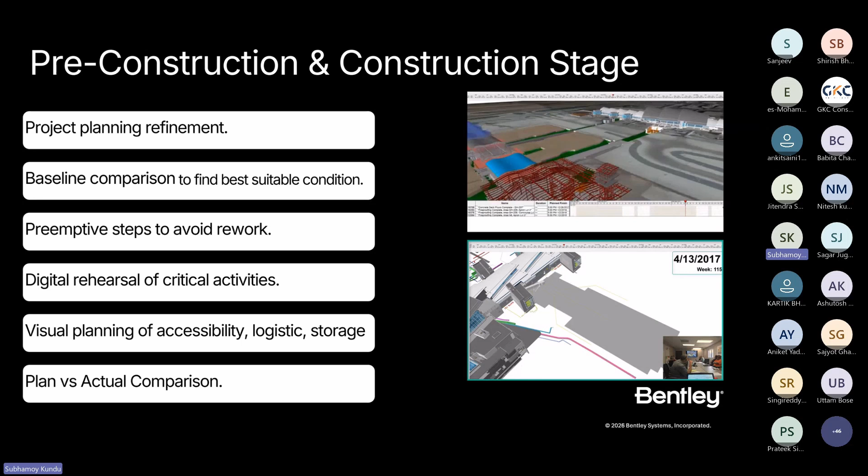Now let us see some real life cases where Synchro has been used as a solution in airport projects. This is an example of the DFW airport extension project at Texas, USA. So how did Synchro help in this project?

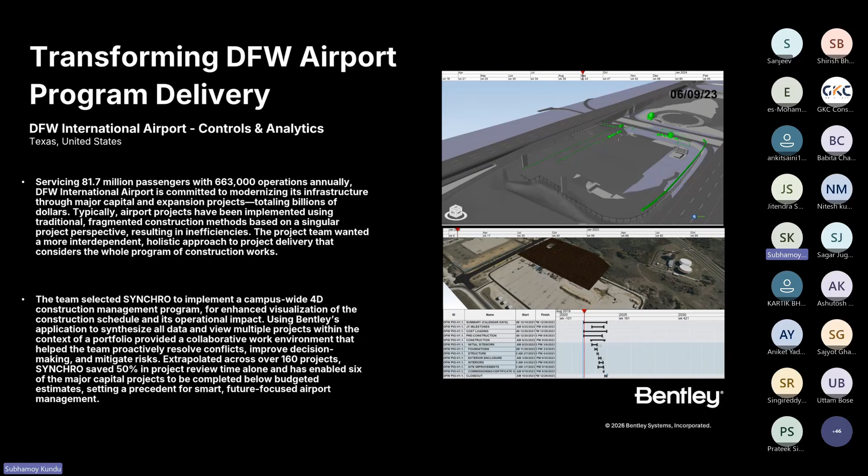Synchro helped the project team take a more interdependent, holistic approach to project delivery that considers the whole program of construction works, instead of using traditional fragmented construction methods based on a singular project perspective, resulting in inefficiencies.

The team implemented a campus-wide 4D construction management program for enhanced visualization of the construction schedule and its operational impact. Synchro saved 50% project review time alone in this project, and Synchro provided a collaborative work environment that helped the team proactively resolve conflicts, improve design decision making, and mitigate risks.

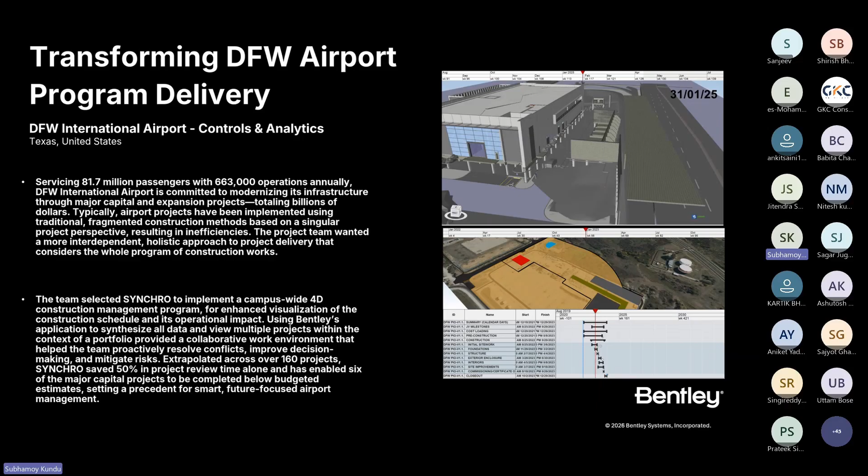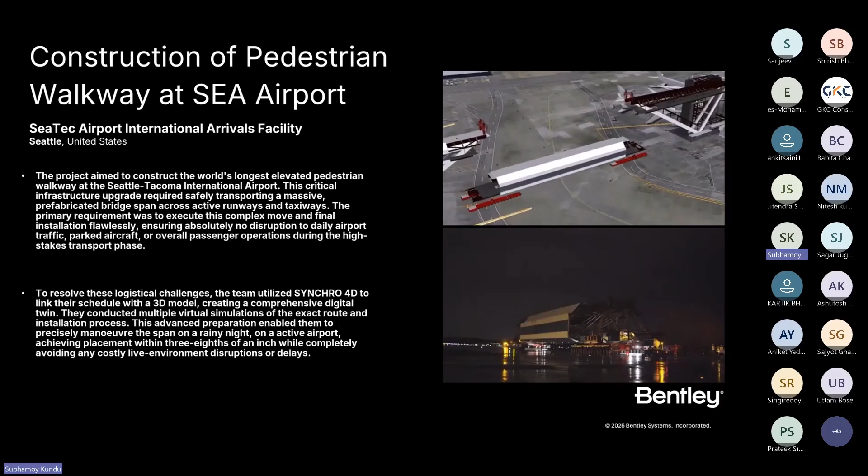This is an example of creation of a new arrival facility at SeaTac Airport in Seattle, USA. The team was looking to place a new elevated pedestrian bridge in an active airport without creating hindrances to day-to-day operations. The main construction partner was Clark Construction Group LLC.

The team linked the construction schedule to a 3D model to create a fully visualized construction digital twin in Synchro. It allowed the team to simulate every step of the transport and installation virtually before executing it in the real world. Synchro enabled the team to execute the move flawlessly on a rainy night, achieving final placement within just 3/8 of an inch, with zero operational disruption in an active and live airport.

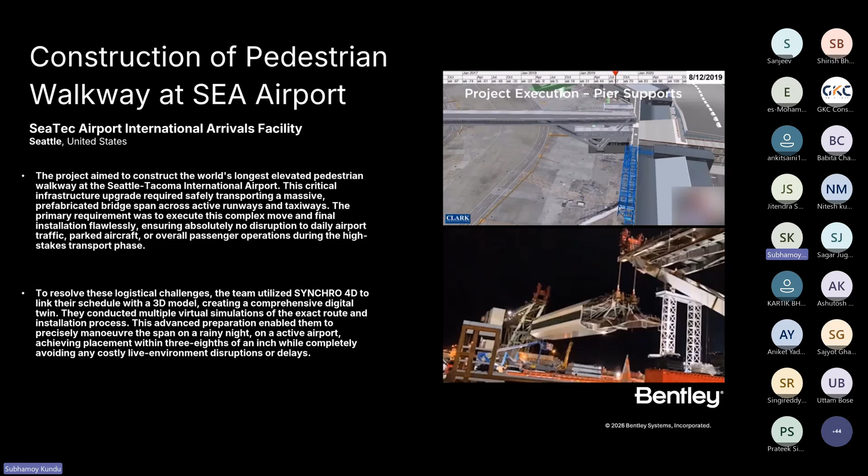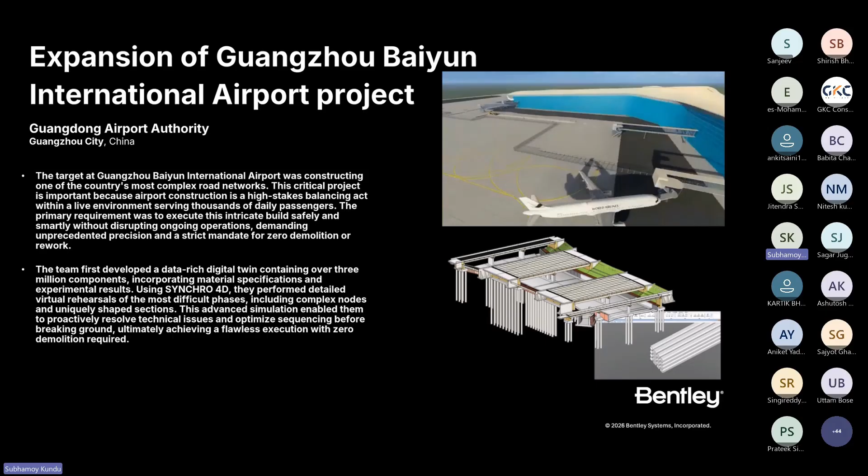Let me tell you about some of the recent airport projects in India where Synchro has been incorporated as a solution. They are as follows: Bagdogra Airport, Varanasi Airport, Navi Mumbai International Airport, Noida International Airport, New Delhi International Airport. With this, I'm coming to an end of my presentation.

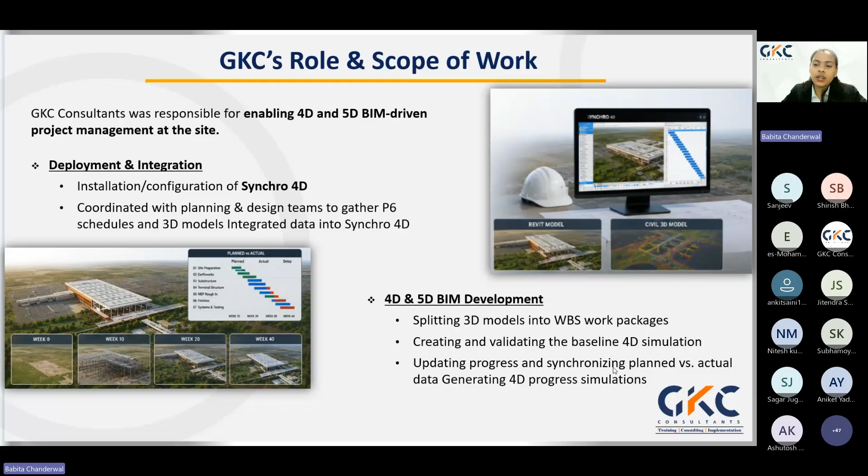After that, the resource and quantity management we have handled. We use the 5D BIM for resource planning and quantity tracking. This helps our team with accurate cost estimation and cost reconciliation, and the risk management part.

Our team will also support the project estimation and safety mockups, which help the planning team very efficiently and very safely. And we also developed the look-ahead plans, which help the team to finalize the delays and the upcoming activities to avoid any delays in this project.

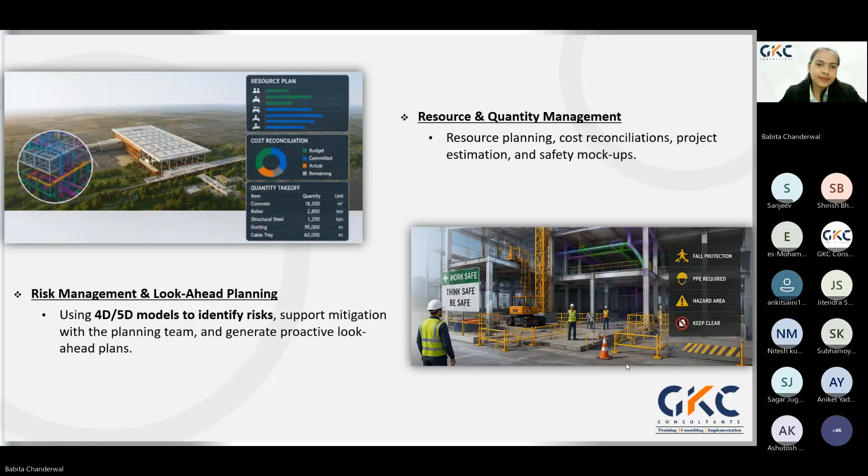After this, the visualization and reporting. To show the construction sequence and site logistics, we use the visualization and reporting part for the 4D and 5D BIM. This helps our team to easily understand how the project will be executed step by step.

And we also use color coding to show the plan versus actual and the status of the delayed activities in the project site and easily track the progress of the project. In the collaboration and support, we also use the 4D for regular site visits, collecting the data from the site and integrating it in Synchro.

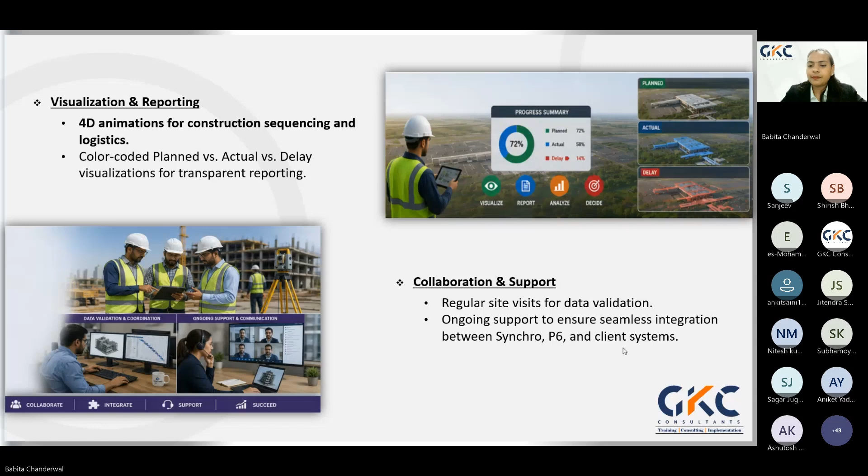So this is the workflow of how we implement the 4D and 5D BIM part in the Jewar airport. So firstly, we collect the data from the site, such as drone images, site photos, and daily progress reports from the site for accurate inputs. Next, we bring the details and the data into the Primavera schedule and connect them with the 3D model in Synchro 4D.

After that, we divide the model into small packages and link each activity with the model in Synchro 4D. After that, we convert the models into the 4D simulation, showing the construction sequence over time. We also compare the plan versus actual using color coding, which gives us clean visualization and understanding of the delay and the progress of the project.

Next is the resource and risk analysis. In this simulation, we identify the project risks, delays, and resource gaps. This allows the team to optimize manpower, material, and planning strategies in advance.

After that, we follow the reporting part. In this, we generate interactive and visual reports in the Synchro cloud. And this helps the stakeholders in quick decision making and better communication for overall project control.

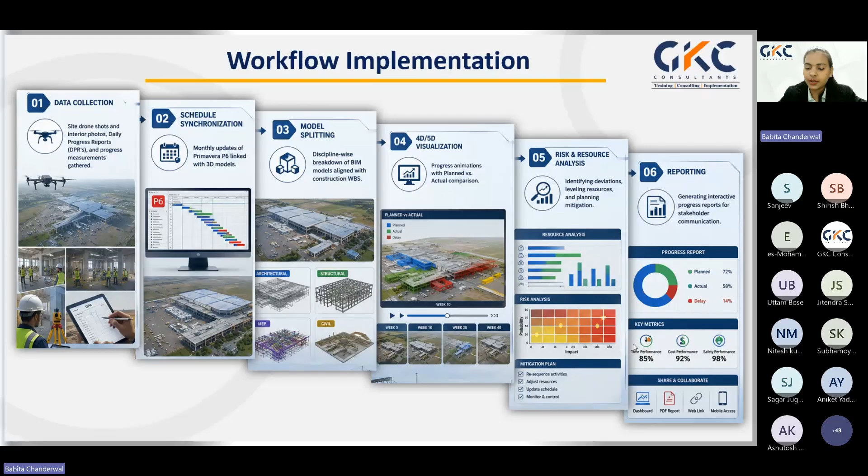So these are the key results and outcomes that we achieved in the project using the 4D and 5D BIM. So we achieved better schedule visibility and control on the project by integrating the schedule in Primavera and finding the plan versus actual, which helps us track critical paths more efficiently.

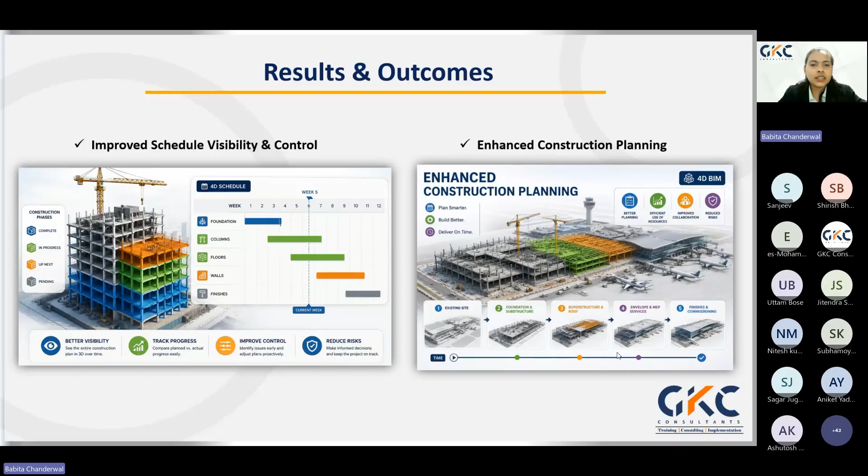Then we enhanced the construction planning. In this, the team plans the sequence in advance, identifies the clashes, and optimizes the execution method before any clashes. Easy risk and delay identification. We had better progress monitoring; regular tracking and model-based updates made reporting more transparent and reliable to all stakeholders.

After that, efficiency, resource, and cost tracking. We are also tracking the cost and the resources that we applied on the site. After the better progress monitoring, we use the 5D, and we also achieve efficiency, resource, and cost tracking for better quantity estimation, manpower planning, and cost control.

Then the visual simulation made it easy for everyone. So we use the 4D for better communication with the site team also. After that, there was reduced rework and coordination issues with the site team. So we use the cloud and field app to communicate with the client, the site team and the office team. And this is also good for faster decision making in the project team.